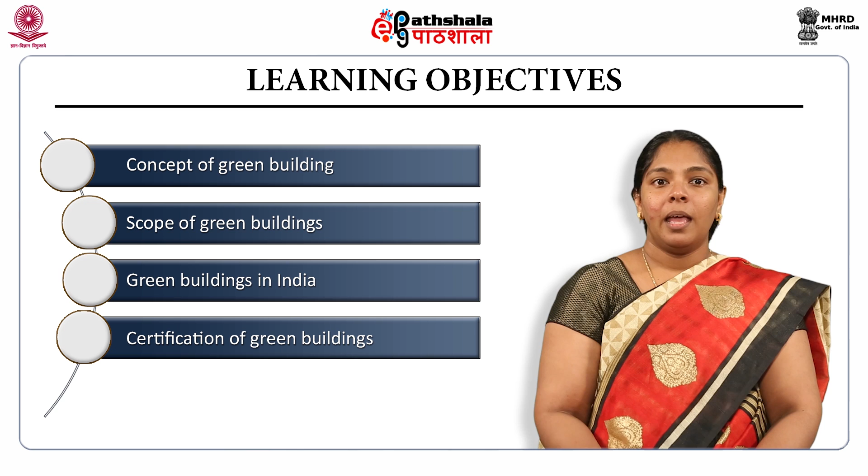The improvement in per capita energy consumption in buildings can be achieved by energy efficient and low carbon building technologies. So, in this module, we are going to discuss the concept of green building, the scope of green buildings in India, the certification of green buildings, and especially GRIHA rating.

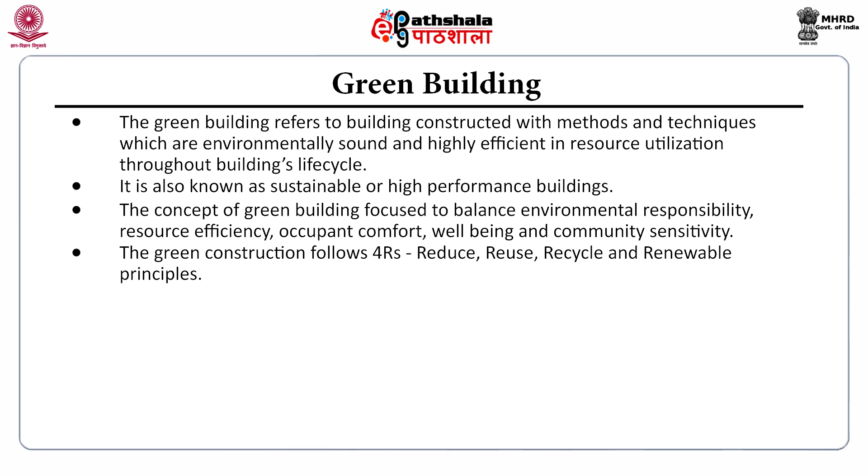Green building refers to buildings constructed with methods and techniques which are environmentally sound and highly efficient in resource utilization throughout the building's life cycle. It is also known as sustainable or high performance buildings. The concept of green building focuses on balancing environmental responsibility, resource efficiency, occupant comfort, well-being and community sensitivity. Green construction follows the major 4 R's: reduce, reuse, recycle and renewable principles.

So, green buildings are designed to reduce the overall impact of the built environment on human health and the natural environment by efficient use of energy, water and other resources. They incorporate sustainable materials in their construction, that is reused, recycled content or made from renewable resources, protecting occupant health and improving employee productivity.

They create healthy indoor environments with minimal pollutants, that is, reduced product emissions. Reducing waste, pollution and environmental degradation. They feature landscaping that reduces water usage, by using native plants that survive without extra water.

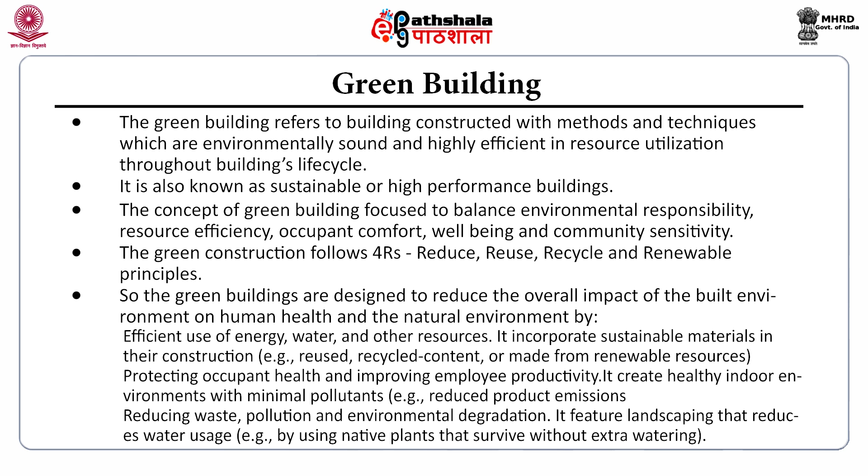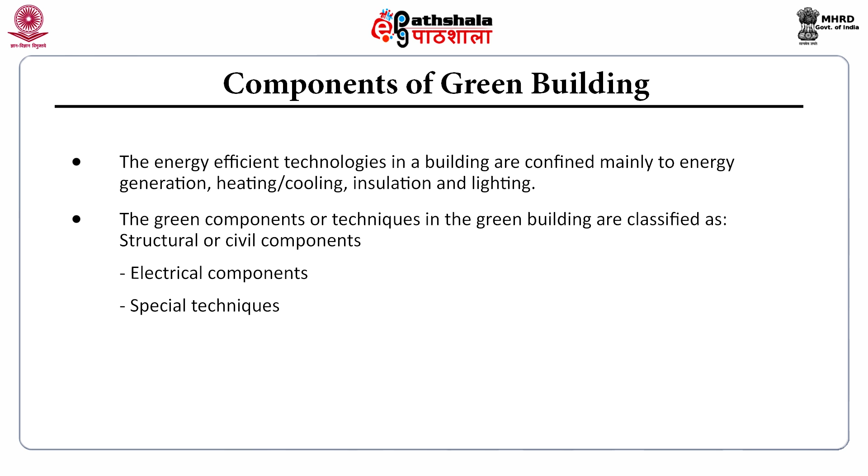What are the components of green building? The energy efficient technologies in a building are confined mainly to energy generation, heating or cooling, insulation and lighting. The green components or techniques in green building are classified as structural or civil components, electrical components and special techniques. What are these structural or civil components?

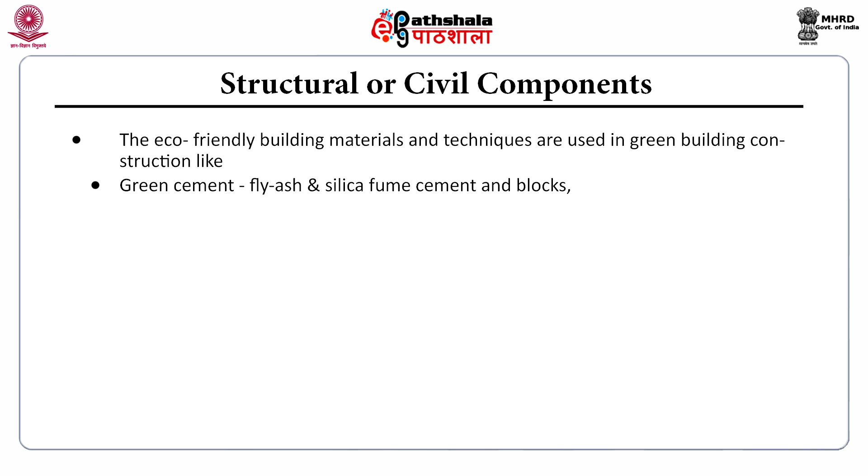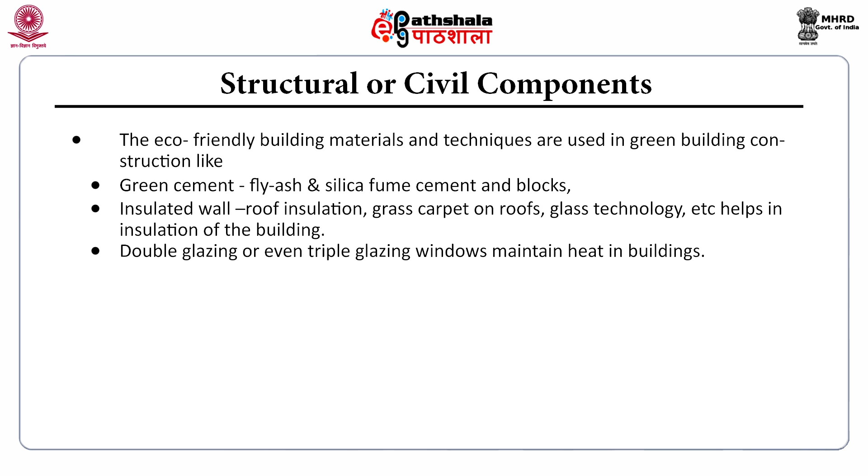Eco-friendly building materials and techniques are used in green building construction, like green cement, that is fly ash silica fume cement and blocks, insulated walls, roof insulation, grass carpet on roofs, glass technology etc., which help in insulation of the building. Double glazing or even triple glazing windows maintain heat in buildings. Smart windows allow light through, but block infrared and ultraviolet radiation that produces heat.

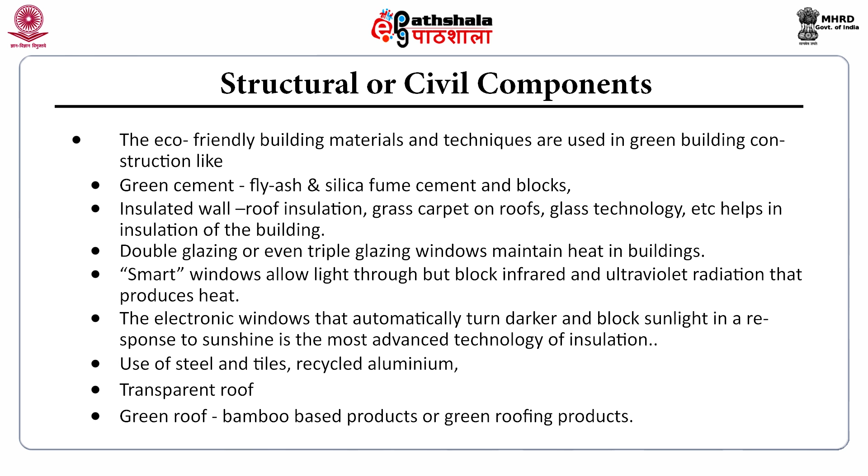Electronic windows automatically turn darker and block sunlight in response to sunshine, which is the most advanced insulation technology. Use of steel and tiles, recycled aluminium, transparent roofs, green roofs, bamboo based products or green roofing products. These are the structural components.

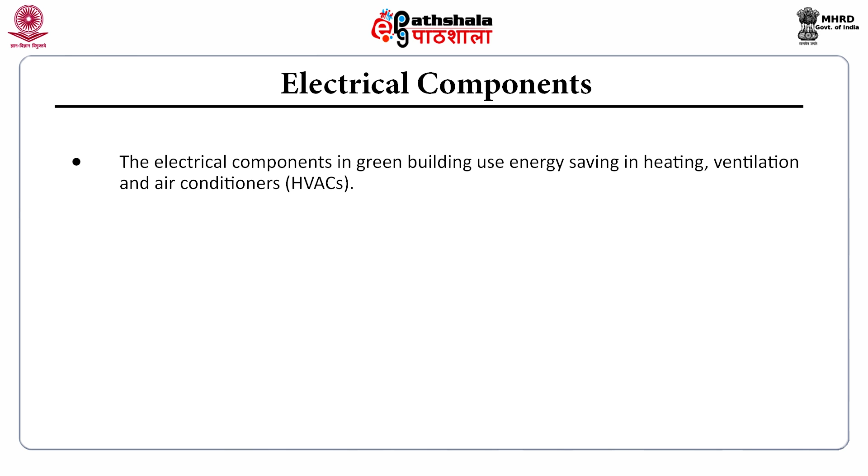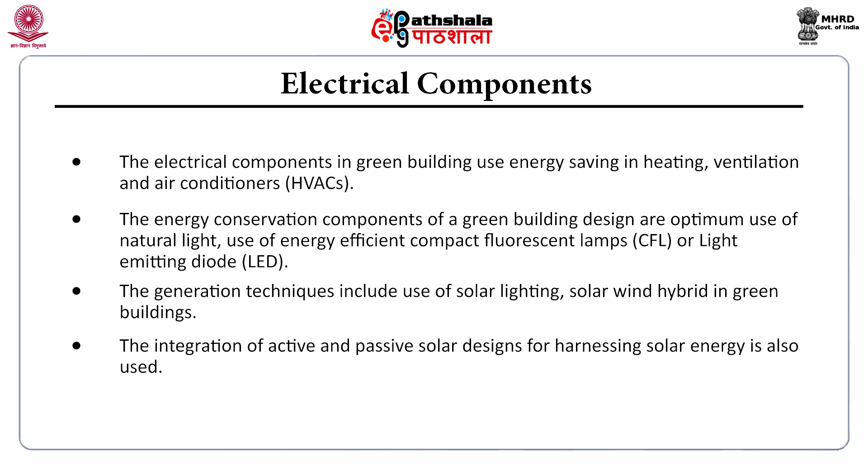Electrical components in green building use energy saving in HVACs, that is heating, ventilation and air conditioning. The energy conservation components of a green building design are optimum use of natural light, use of energy efficient compact fluorescent lamps, that is CFL lamps, and LEDs, light emitting diode lamps. The generation techniques include use of solar lighting and solar wind hybrids in green buildings. The integration of active and passive solar designs for harnessing solar energy is also used.

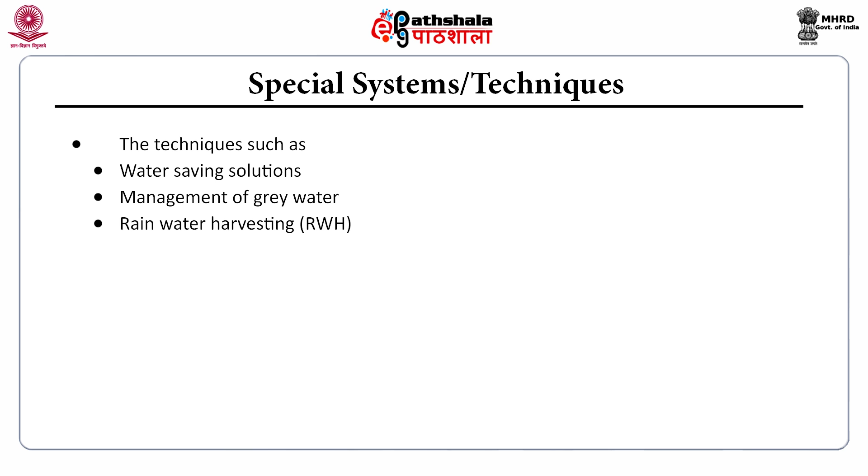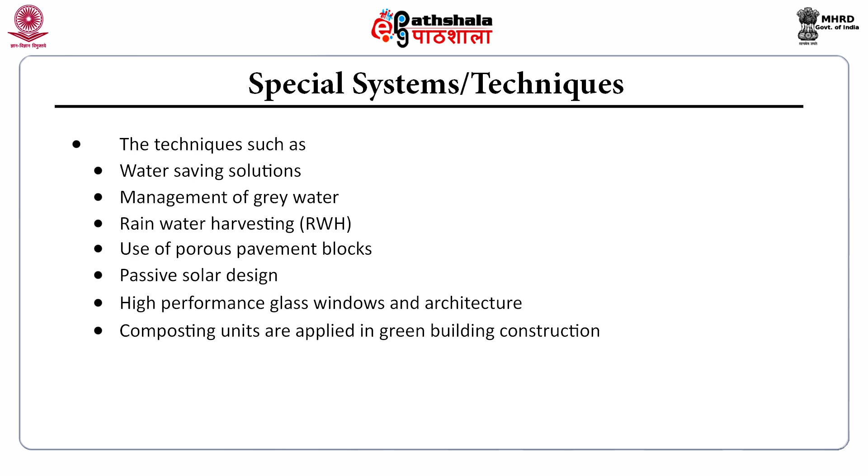The special systems or techniques are water saving solutions, management of grey water, rainwater harvesting, use of porous pavement blocks, passive solar design, high performance glass windows and architecture, and composting units. These are applied in green building construction. Scope of green buildings.

In developing countries, energy consumption is mostly for cooking, while in developed countries like the US, energy use is mainly for space heating, lighting and other appliances. The home size in the USA is also higher than in India. In India, it is around 40 square meters, while in the USA, it averages 200 square meters.

The average annual change in buildings energy consumption in India is 2.7% per year from 2015 to 2040. The global consumption of electricity in buildings is growing at a rate of 2.5% per year. In non-OECD countries, the electricity usage is increased by nearly 6%.

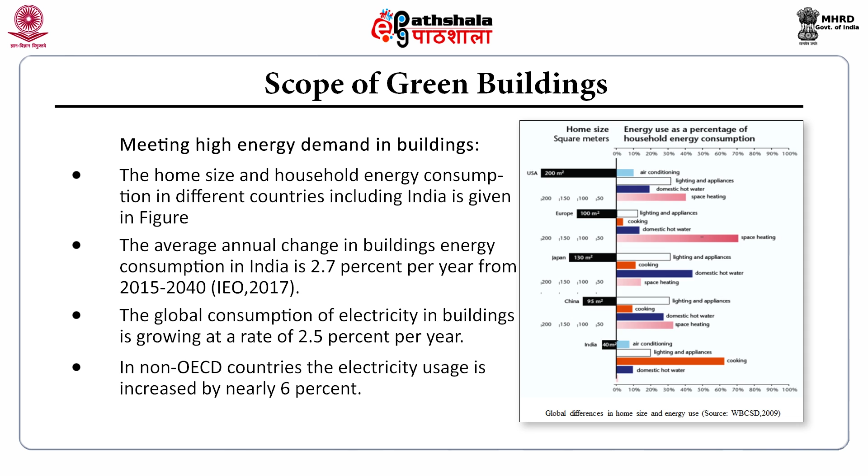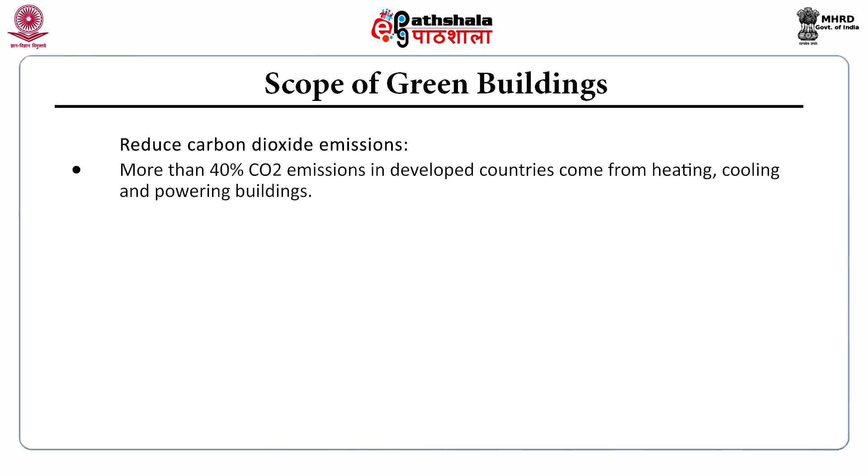Coming to the next scope of this green building, it is the reduction in the carbon dioxide emission. More than 40% of carbon dioxide emissions in developed countries come from heating, cooling and powering buildings. Good insulation, window glazing and recovering heat from ventilation systems are efficient ways to reduce emissions.

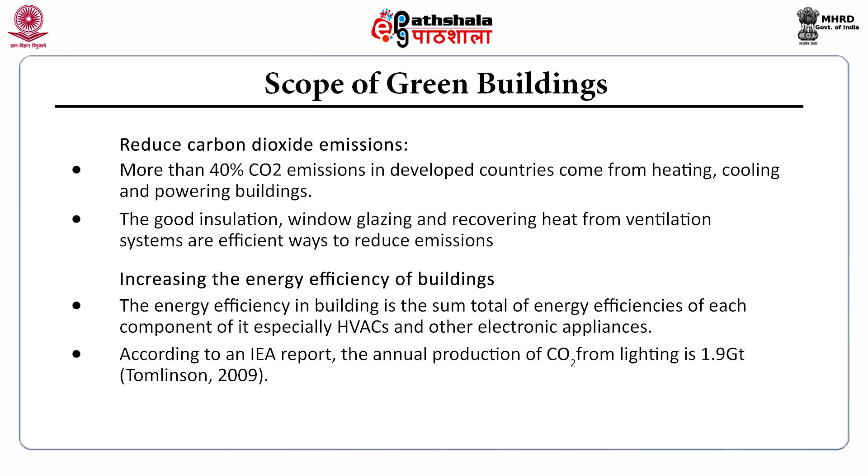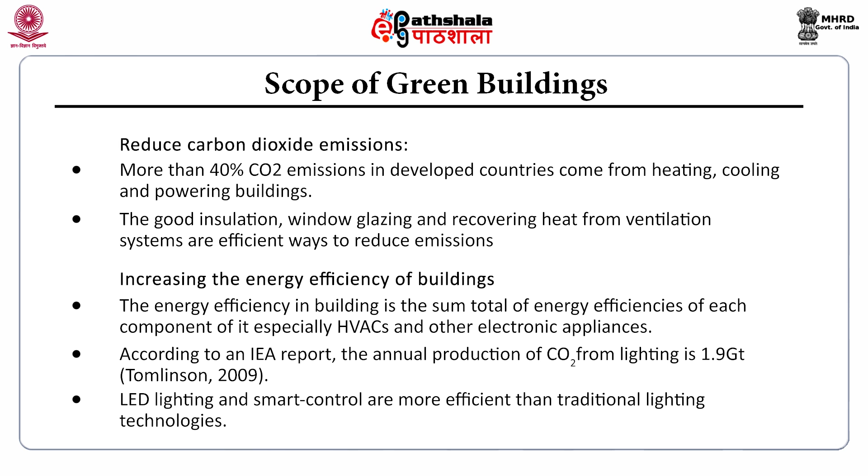Increasing the energy efficiency of buildings. The energy efficiency in a building is the sum total of energy efficiencies of each component of it, especially these HVACs and other electronic appliances. According to an International Energy Agency report, the annual production of carbon dioxide from lighting is 1.9 gigatons. LED lighting and smart control lighting are more efficient than the traditional lighting technologies.

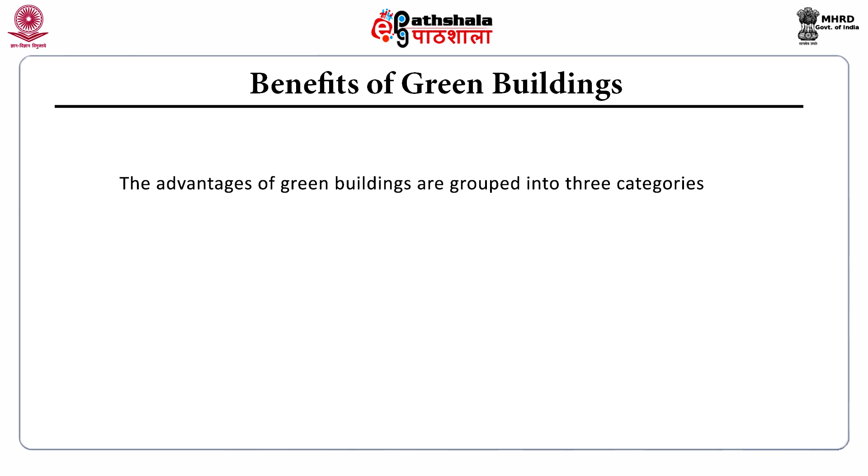What are the benefits of this green building? We have seen the scope. The advantages of green buildings are grouped into three categories: environmental, economic and social. What are the environmental benefits of a green building? It improves the air quality. The carbon dioxide emission from green buildings is comparatively lesser than the conventional buildings. It is aimed at water conservation and improves water quality.

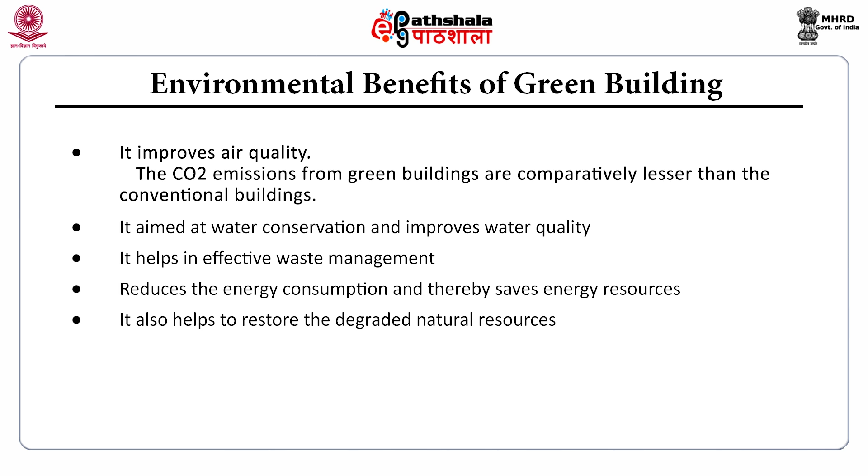It helps in effective waste management. It reduces the energy consumption and thereby saves energy resources. It enables conservation of natural resources. It also helps to restore the degraded natural resources. These buildings conserve the biodiversity and also protect the ecosystem. Green buildings prevent habitat destruction for energy production and pollution from fossil fuel combustion that threaten this biodiversity.

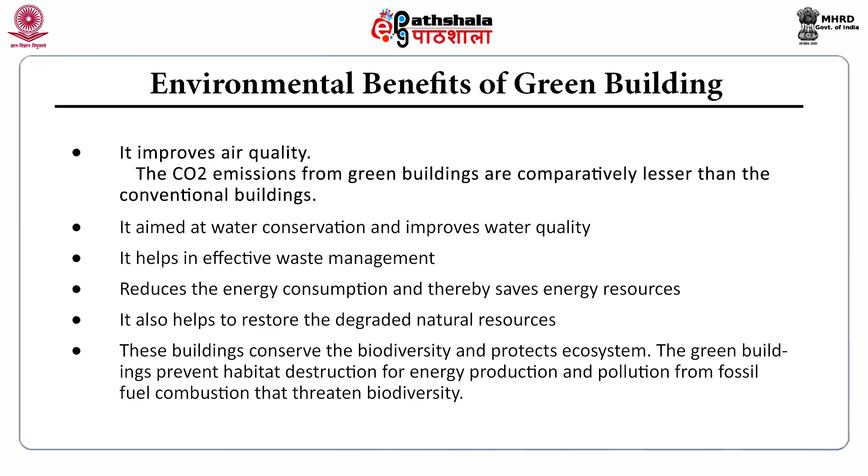What are the economic benefits? Cost effectiveness in the long term is the economic benefit of green building. It reduces the electricity consumption and so the charges to be paid also get reduced. The operational cost in the buildings is comparatively less. It helps in optimization of life cycle economic performance. It improves the productivity of the occupants living in the building. The water consumption gets reduced and wastewater generation and treatment also get reduced.

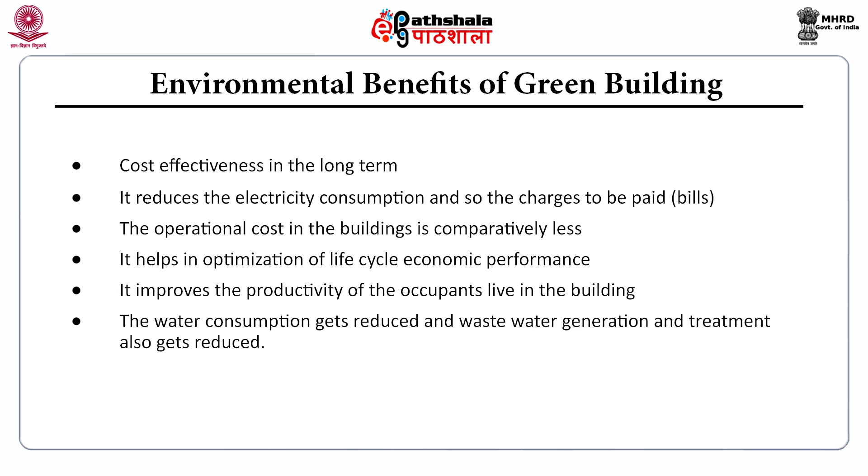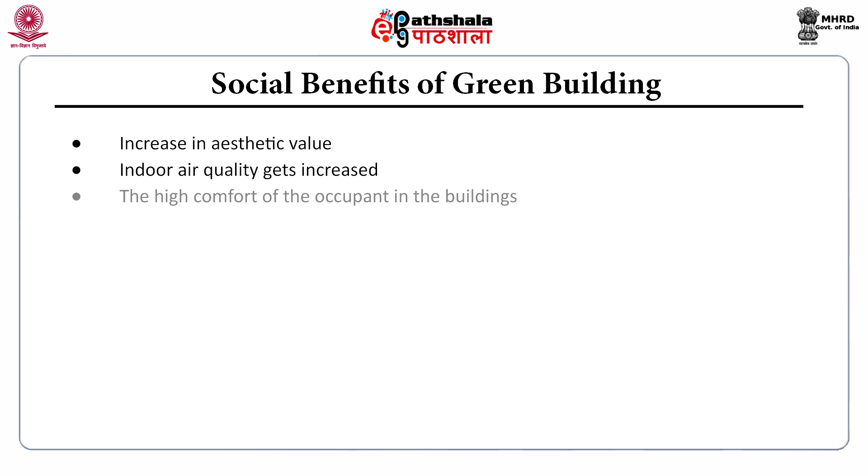The social benefits of green building include increase in aesthetic value, increased indoor air quality, high comfort to the occupant, improving the occupant health, improving overall life quality, enhancing occupant health and comfort. The infrastructure use also gets reduced and thereby the pressure on it also gets reduced.

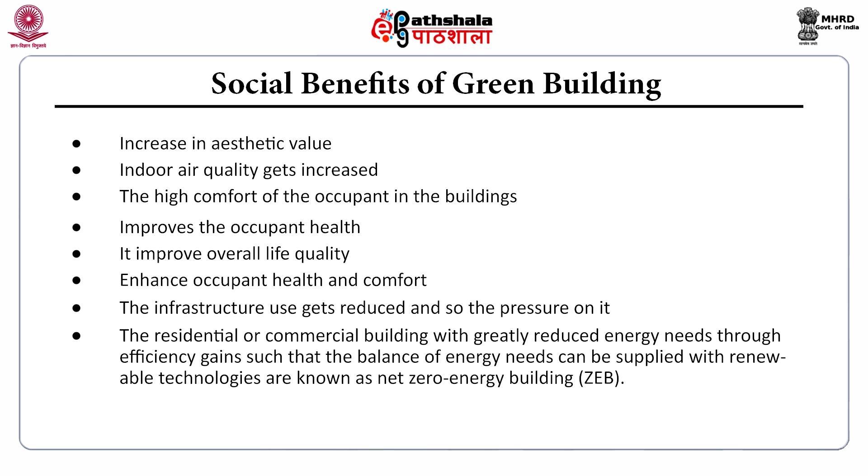A residential or commercial building with greatly reduced energy needs through these efficiency gains, such that the balance of energy needs can be supplied with renewable technologies, is known as a net zero energy building. So, we have seen what is green building and what are its benefits. Now, what are the green buildings presently seen in India?

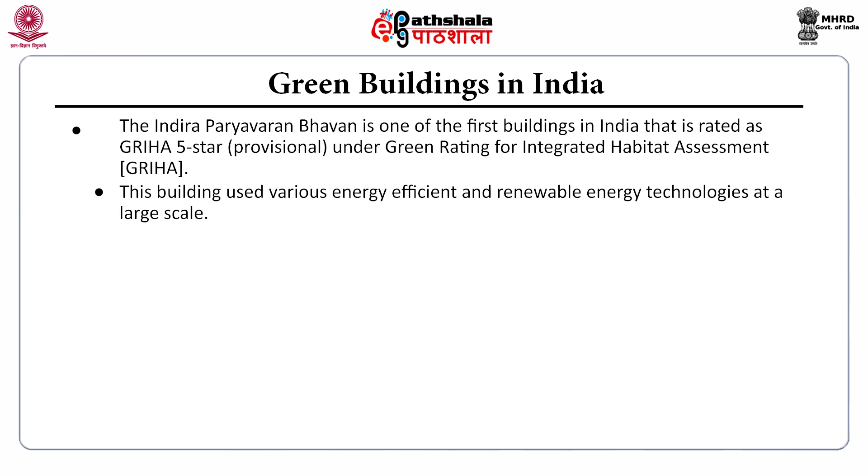One of the important green buildings is the Indira Paryavaran Bhavan building. It is one of the first buildings in India that is rated GRIHA 5-star under the Green Rating for Integrated Habitat Assessment. GRIHA means Green Rating for Integrated Habitat Assessment. This building used various energy efficient and renewable energy technologies at a large scale.

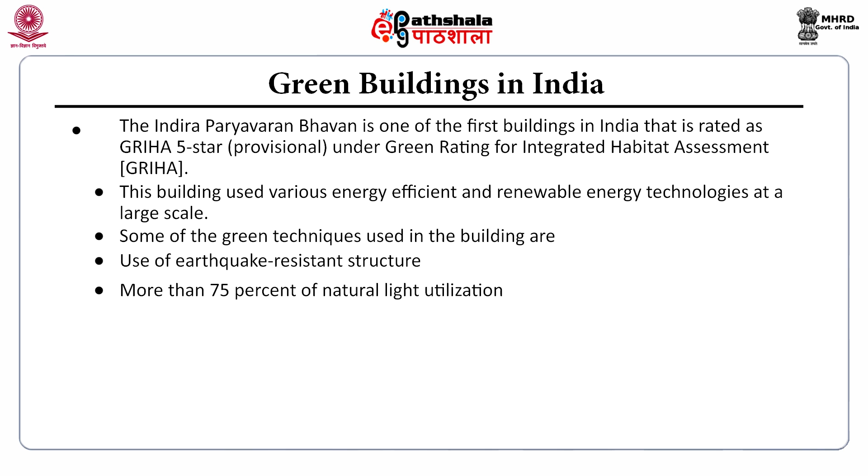Some of the green techniques used in this building are the usage of an earthquake resistant structure, more than 75% natural light utilization, a thin client networking system, a robotic parking system in the basement for accommodating around 300 plus cars, and planting trees and grasses in more than 50% of the area outside the building. This building is also fully compliant with the requirements of ECBC, that is the Energy Conservation Building Code of India.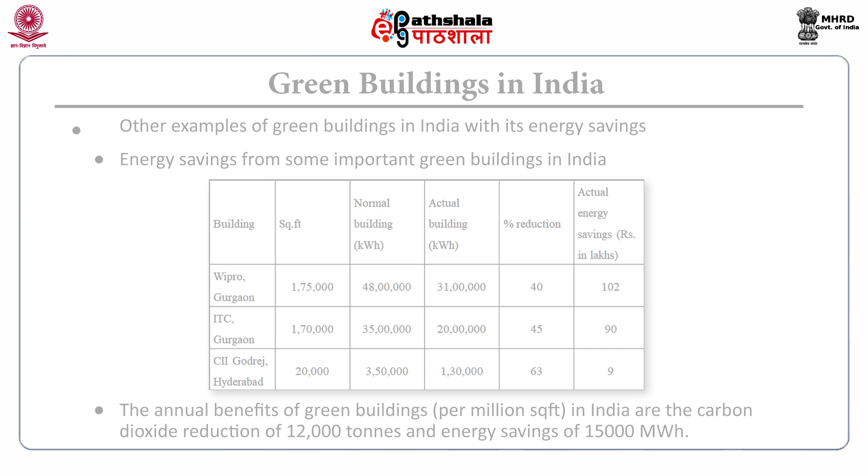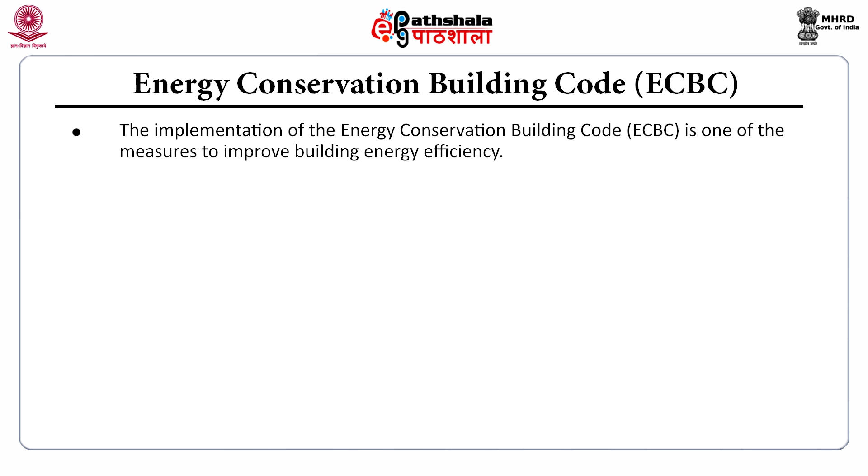Now, what is this ECBC, that is the Energy Conservation Building Code? The implementation of the ECBC is one of the measures to improve building energy efficiency. It is the first building code in India and was launched in February 2007 by the Bureau of Energy Efficiency. This code is applicable to new commercial buildings with a connected load above 100 kilowatt or a contract demand of over 120 kilovolt amperes.

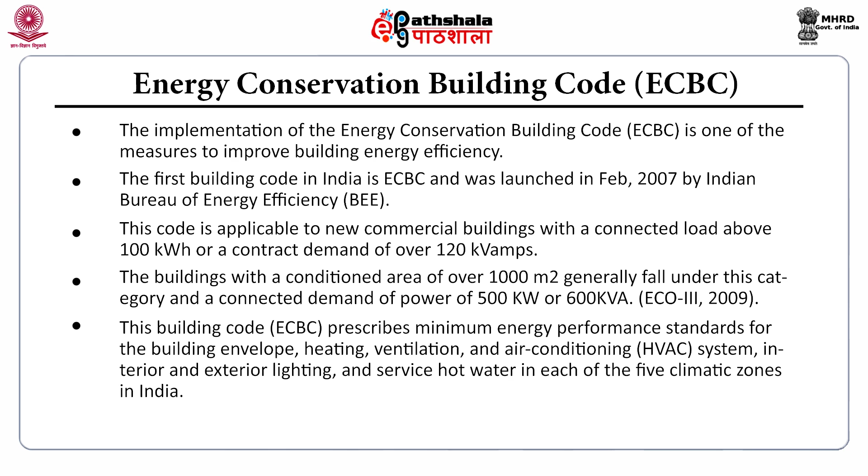The buildings with a conditioned area of over 1000 square meters generally fall under this category, and a connected demand of power of 500 kilowatt or 600 kilovolt ampere. This building code prescribes minimum energy performance standards for the building envelope, heating, ventilation and air conditioning system, interior and exterior lighting and service hot water in each of the 5 climatic zones in India. It also sets energy efficiency requirements for building electric power and motors.

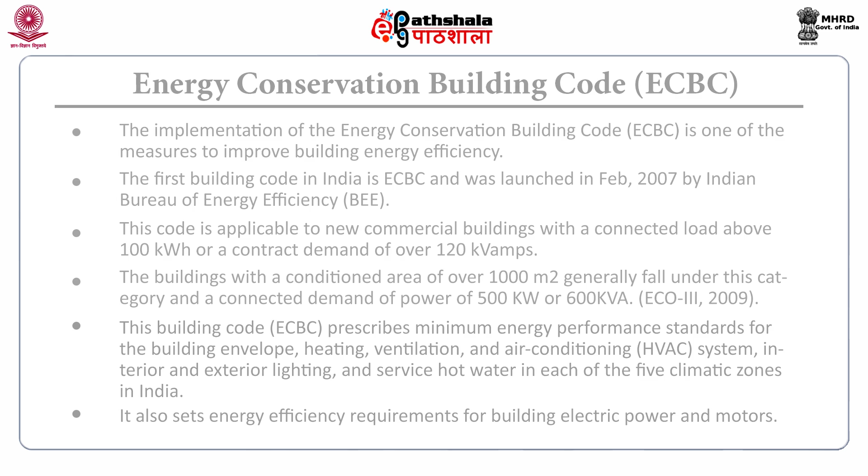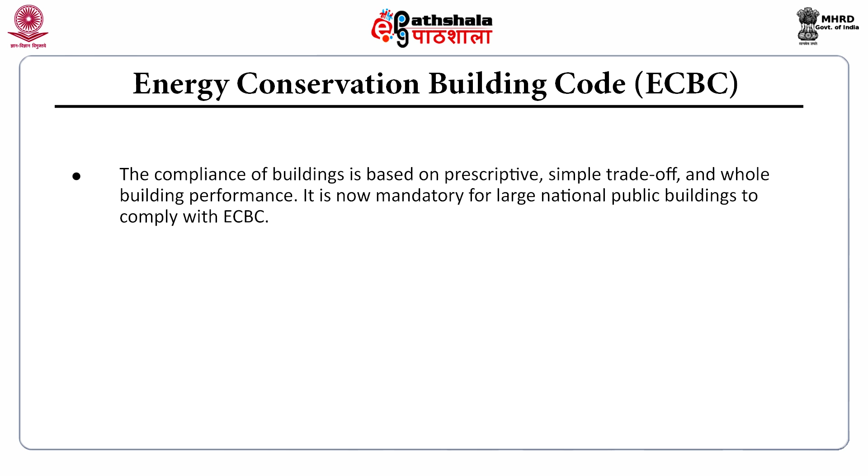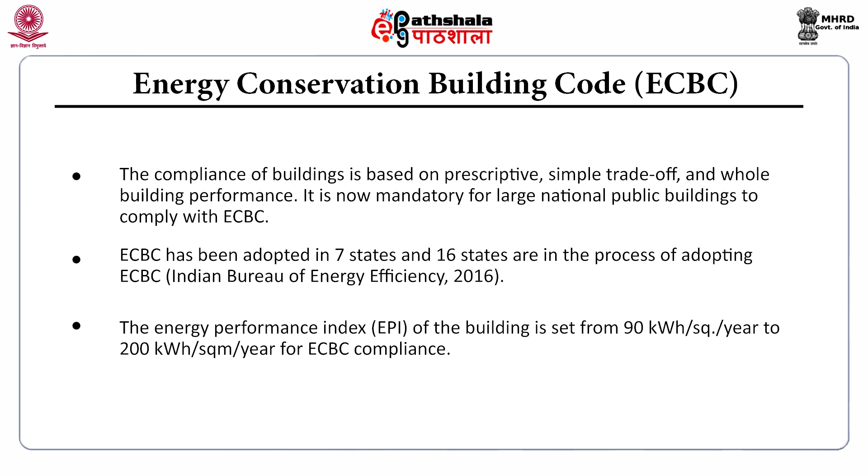The compliance of building is based on prescriptive, simple trade-off and whole building performance. It is now mandatory for large national public buildings to comply with ECBC. It has been adopted in 7 states and 16 states are in the process of adopting this code. The energy performance index of the building is set from 90 kilowatt hour per square meter per year to 200 kilowatt hour per square meter per year for the ECBC compliance.

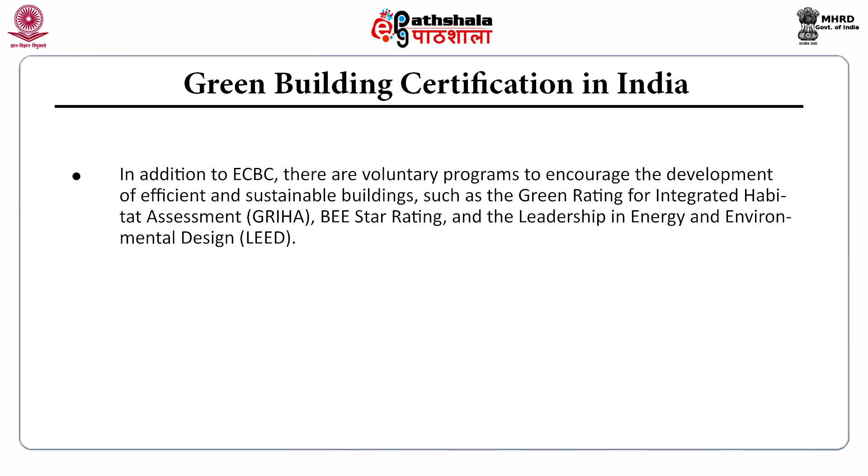Green building certification in India. In addition to this ECBC, there are voluntary programs to encourage the development of efficient and sustainable buildings. These include GRIHA rating, that is Green Rating for Integrated Habitat Assessment, BEE, Bureau of Energy Efficiency Star Rating, and LEED, that is Leadership in Energy and Environmental Design. Let's see what this GRIHA means. The Green Rating for Integrated Habitat Assessment is the recent national rating system of India. It was developed by the Energy and Resources Institute jointly with the Ministry of New and Renewable Energy.

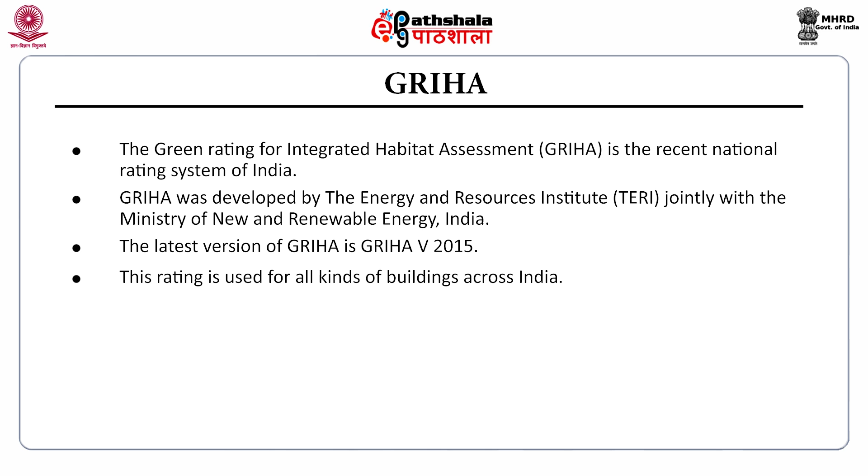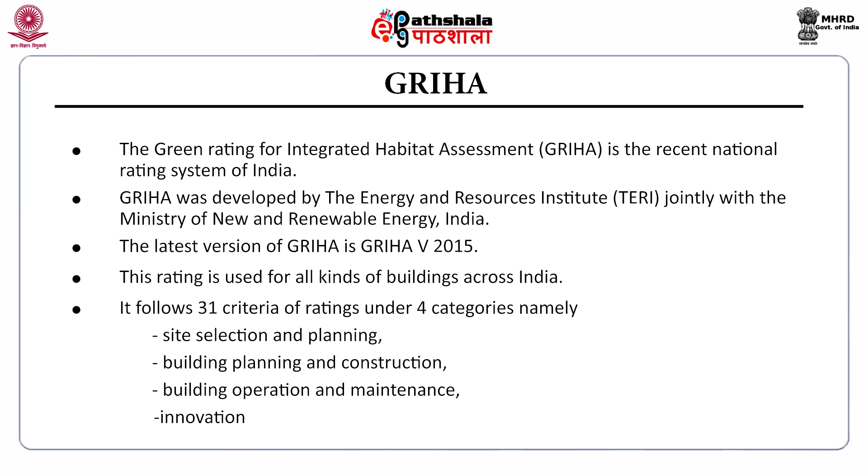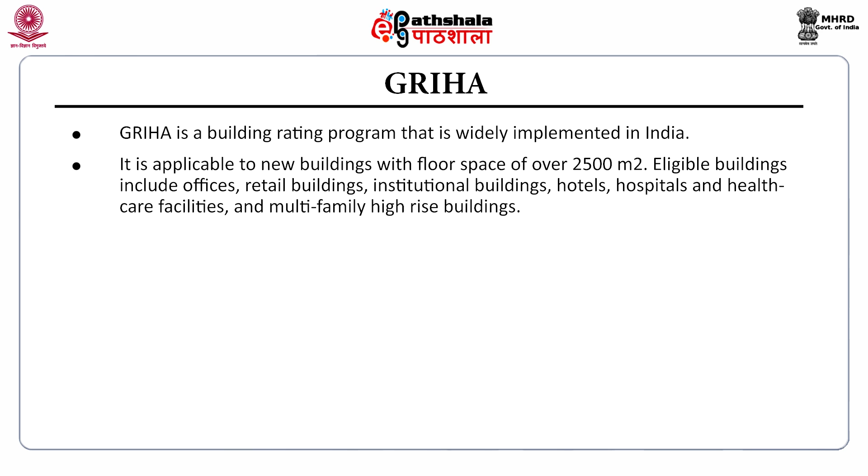The latest version of GRIHA is GRIHA V 2015. This rating is used for all kinds of buildings across India. It follows 31 criteria of rating under 4 categories, namely site selection and planning, building planning and construction, building operation and maintenance, and innovation. GRIHA is a building rating program that is widely implemented in India. It is applicable to new buildings with floor space of over 2,500 square meters. Eligible buildings include offices, retail buildings, institutional buildings, hotels, hospitals, healthcare facilities, multifamily high-rise buildings.

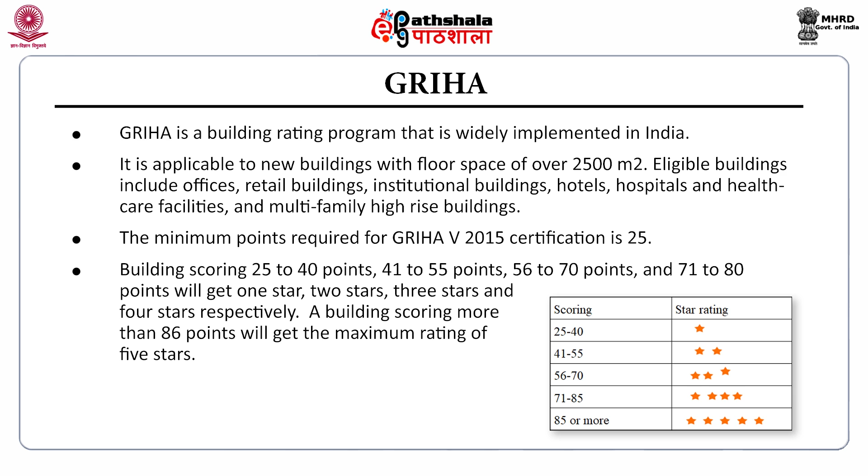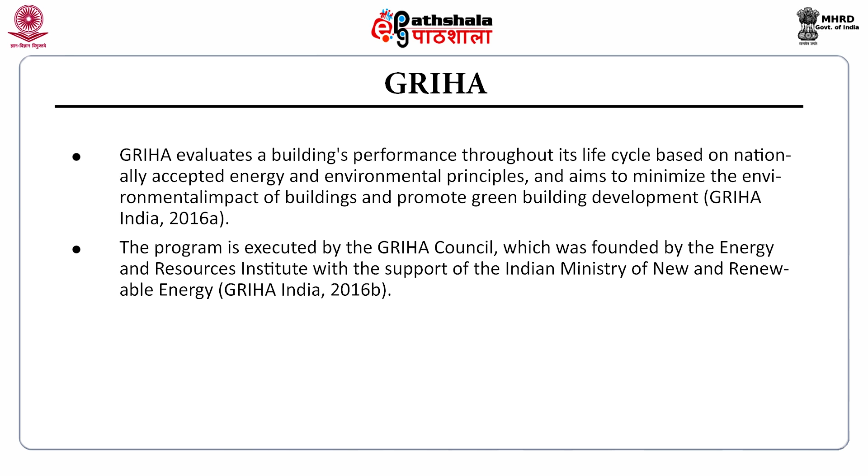The minimum points required for GRIHA V 2015 certification is 25. Buildings scoring 25 to 40 points will get 1 star, 41 to 55 points will get 2 star, 56 to 70 will get 3 star, 71 to 80 points will get 4 star respectively. A building scoring more than 86 points will get a maximum rating of 5 star. GRIHA evaluates a building's performance throughout its life cycle based on nationally accepted energy and environmental principles, and it aims to minimize the environmental impact of buildings and promote green building development. The program is executed by GRIHA Council, which was founded by the Energy and Resources Institute. There are currently 700 plus projects registered with this GRIHA system as per 2016 records.

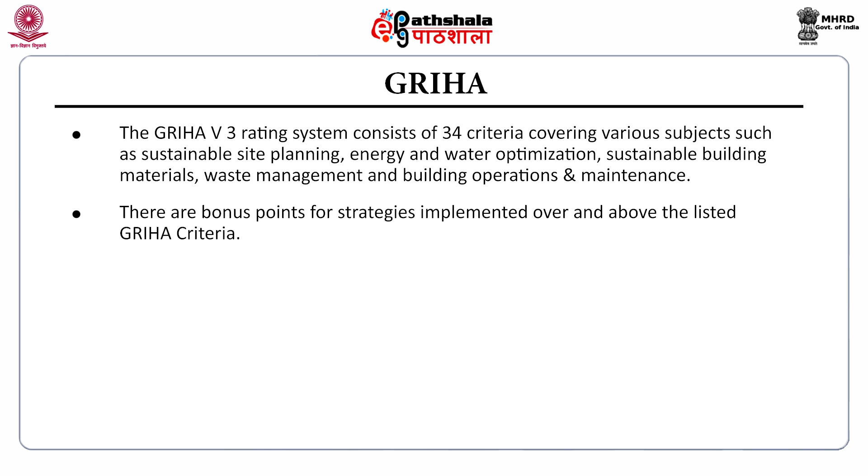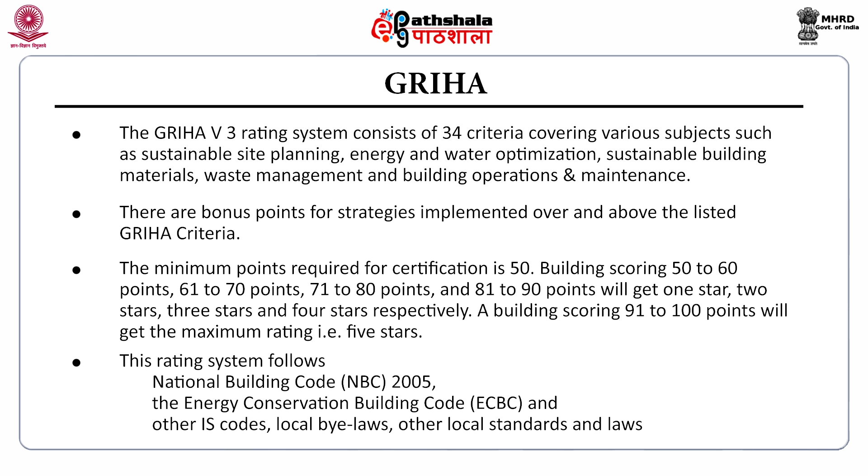The GRIHA rating system consists of 34 criteria covering various subjects such as sustainable site planning, energy and water optimization, sustainable building materials, waste management and building operation and maintenance. There are bonus points for strategies implemented over and above the listed GRIHA criteria. The minimum points required for certification is 50. Buildings scoring 50 to 60 points, 61 to 70, 71 to 80 and 81 to 90 points will get 1, 2, 3 and 4 star respectively. A building scoring 91 to 100 will get maximum rating of 5 star. This rating system follows National Building Code 2005 and the ECBC and other Indian standard codes, local bylaws and other local standards and laws.

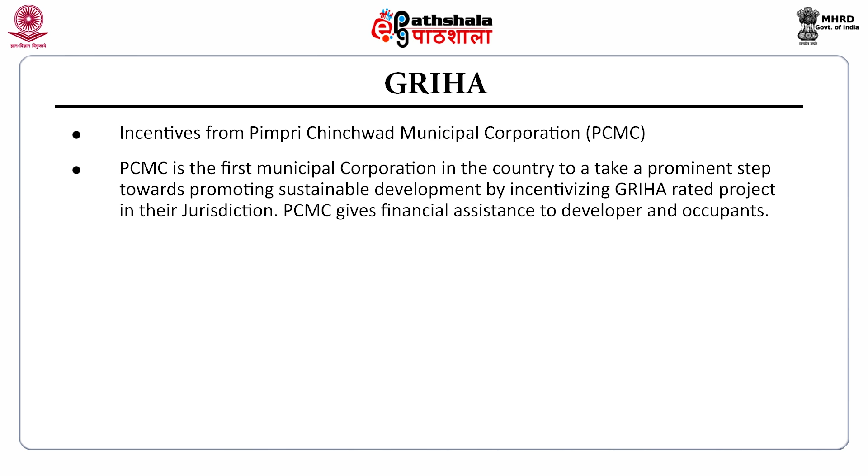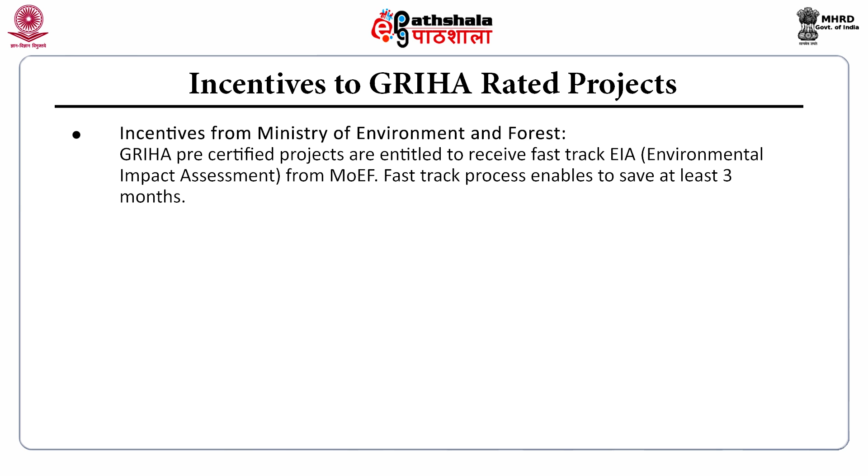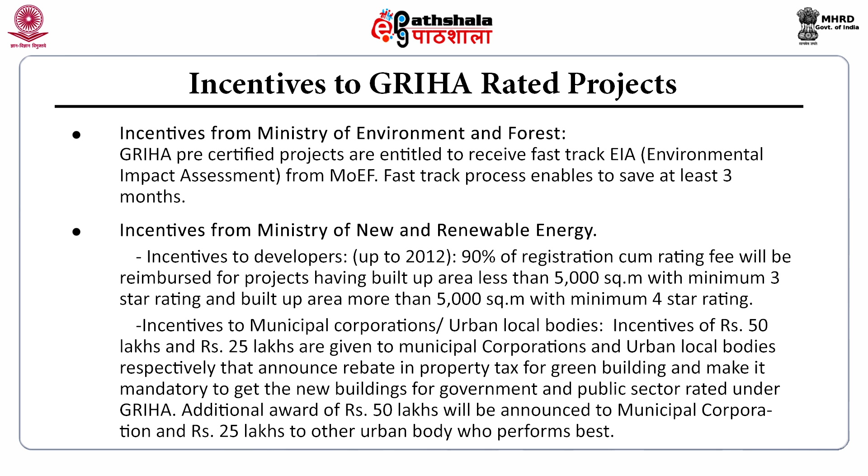Incentives from MNRE: they have given incentives to the developers up to 2012. 90% of the registration cum rating fee will be reimbursed for projects having built-up area less than 5,000 square meters with a minimum 3-star rating and built-up area more than 5,000 square meters with minimum 4-star rating. They have also given incentives to municipal corporations and urban local bodies. Incentives of rupees 50 lakh and rupees 25 lakh are given to municipal corporations and urban local bodies respectively that announce rebate in property tax for green buildings and make it mandatory to get new government and public sector buildings rated under GRIHA.

And also the incentives from the banks. Small Industries Development Bank of India has announced a scheme of providing financial assistance at a concessional rate of interest to GRIHA rated projects. For GRIHA compliant projects, the processing fee is waived by SBI for home loans. SBI gives 0.25% rebate.

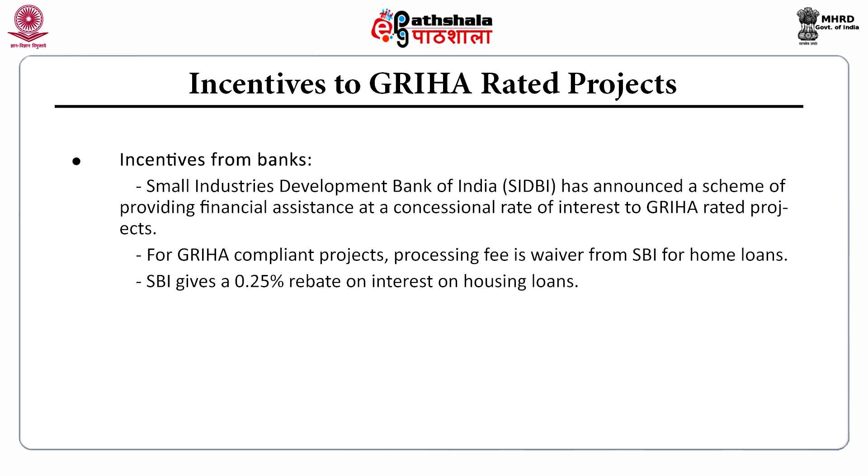GRIHA in detail. Now what is this LEED? That is the Leadership in Energy and Environmental Design Rating System. It's a product of the US Green Building Council that provides a complete framework for assessing building performance and meeting sustainability goals within a 6 category rating system. The categories are sustainable sites, water efficiency, energy and atmosphere, materials and resources, indoor environmental quality and innovation and design.

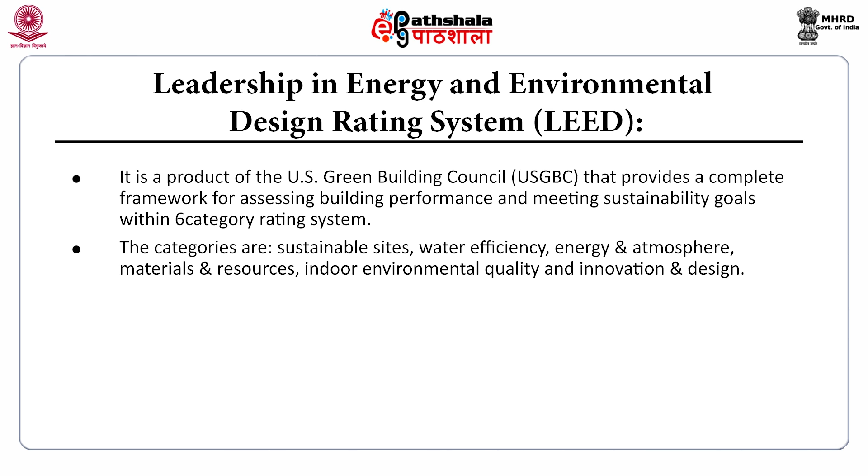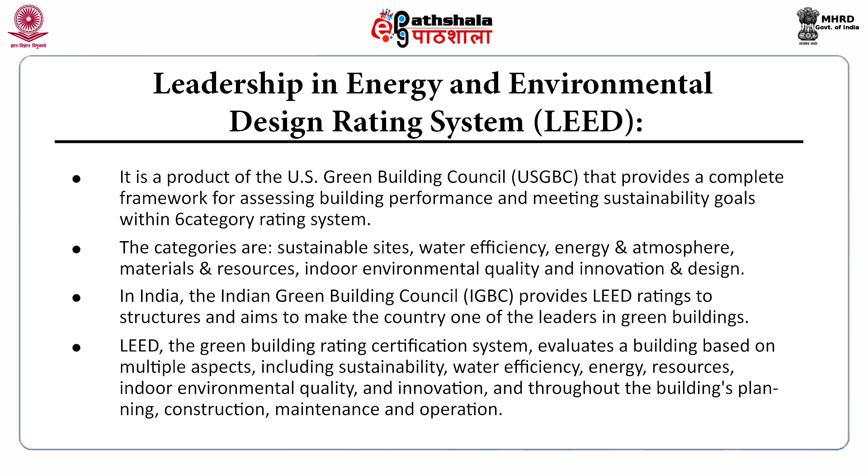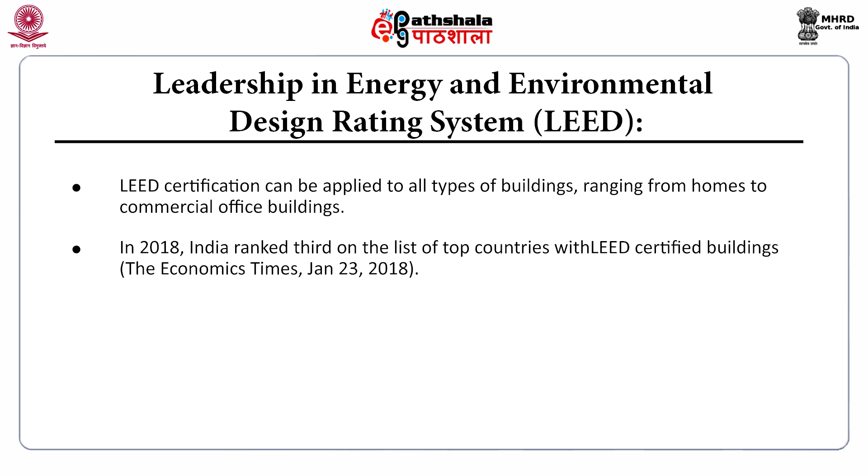In India, the Indian Green Building Council provides LEED ratings to structures and aims to make the country one of the leaders in green buildings. LEED, the Green Building Rating Certification System, evaluates a building based on multiple aspects including sustainability, water efficiency, energy, resources, indoor environmental quality and innovation, throughout the building's planning, construction, maintenance and operation. LEED certification can be applied to all types of buildings ranging from homes to commercial office buildings. In 2018, India ranked 3rd on the list of top countries with LEED certified buildings.

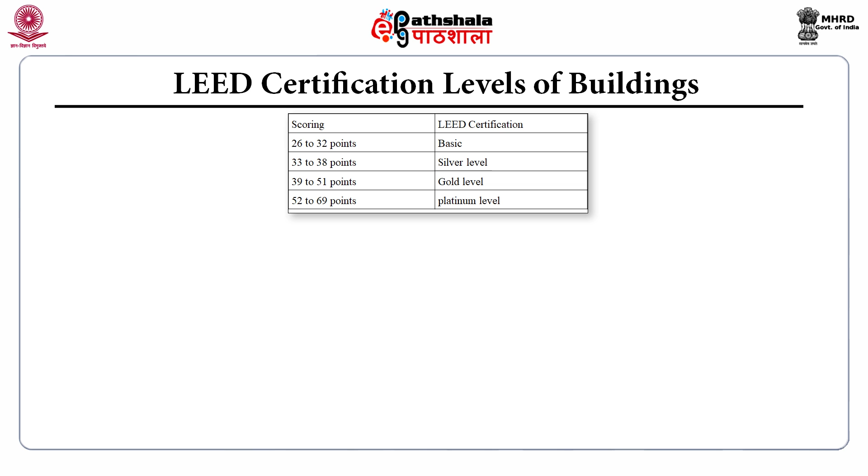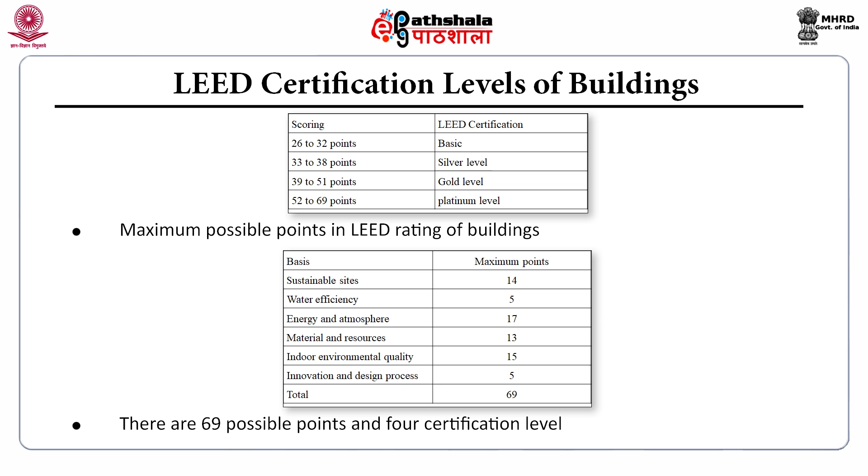In this slide, you can see the LEED certification levels. It has 4 levels, that is basic, silver, gold and platinum, having different scoring. If it is 26 to 32, that is basic level; 33 to 38 is silver level, 39 to 51 gold level and 52 to 69 platinum level. And you can see the maximum possible points in LEED rating of buildings in this table. There are 69 possible points and we have seen the 4 certification levels under LEED.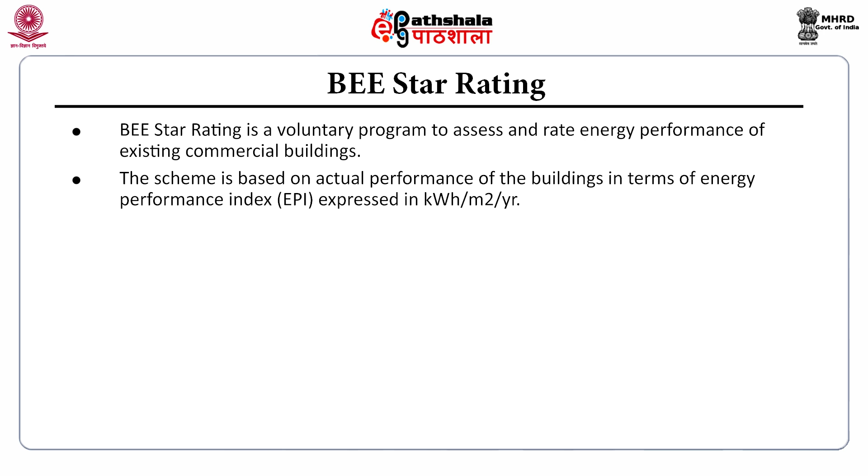Bureau of Energy Efficiency Star Rating. It's a voluntary program to assess and rate energy performance of existing commercial buildings. The scheme is based on actual performance of the building in terms of energy performance index, expressed in kilowatt hour per square meter per year. The scale used is 1 to 5. This rating is applicable for both air-conditioned and non-air-conditioned buildings. This program will rate buildings having a connected load of 100 kilowatt and above.

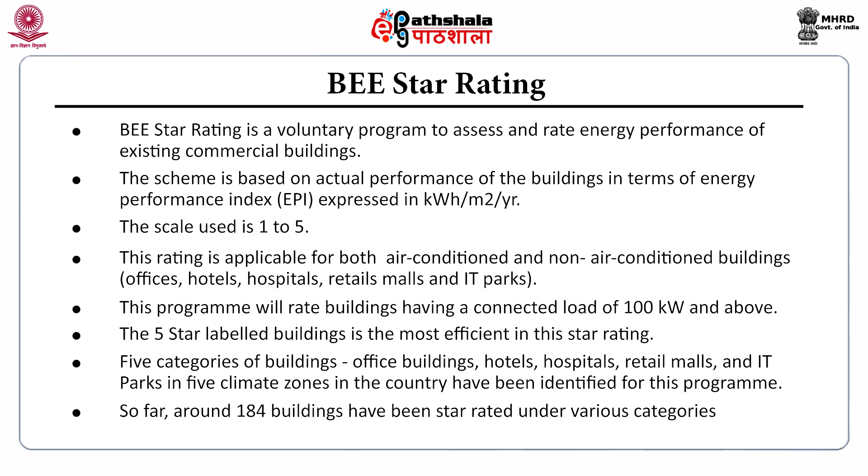The 5-star labeled building is the most efficient in this star rating. 5 categories of buildings: office buildings, hotels, hospitals, retail malls and IT parks in 5 climate zones of the country have been identified for this BEE rating. And so far 184 plus buildings have been star rated under these various categories.

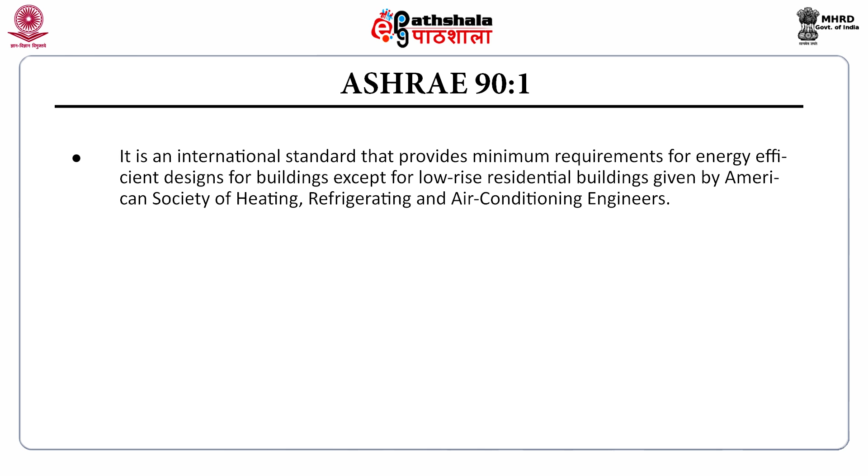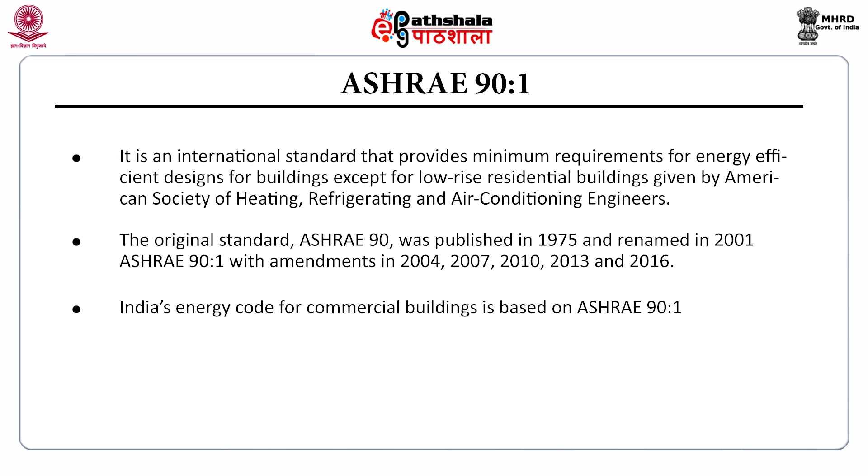Another rating is ASHRAE 90.1. It is an international standard that provides minimum requirements for energy efficient designs for buildings except low-rise residential buildings, given by the American Society of Heating, Refrigerating and Air Conditioning Engineers. The original standard ASHRAE 90 was published in 1975 and it was renamed in 2001 as ASHRAE 90.1 with amendments in 2004, 2007, 2010, 2013 and 2016. India's energy code for commercial buildings is based on this rating.

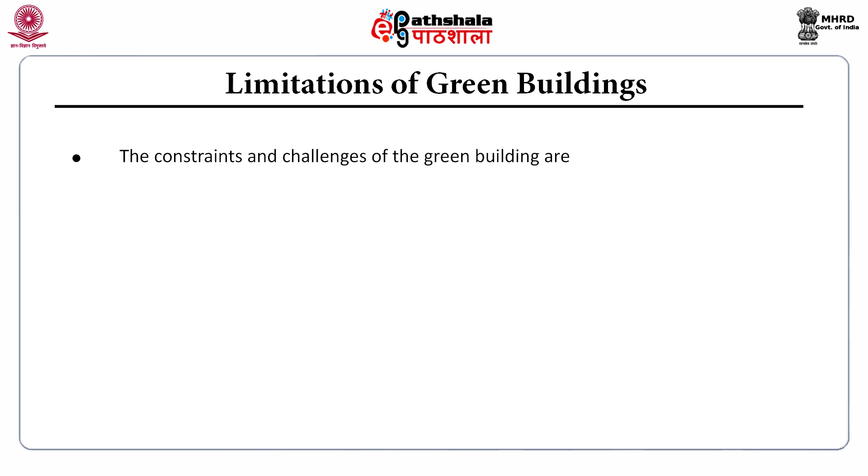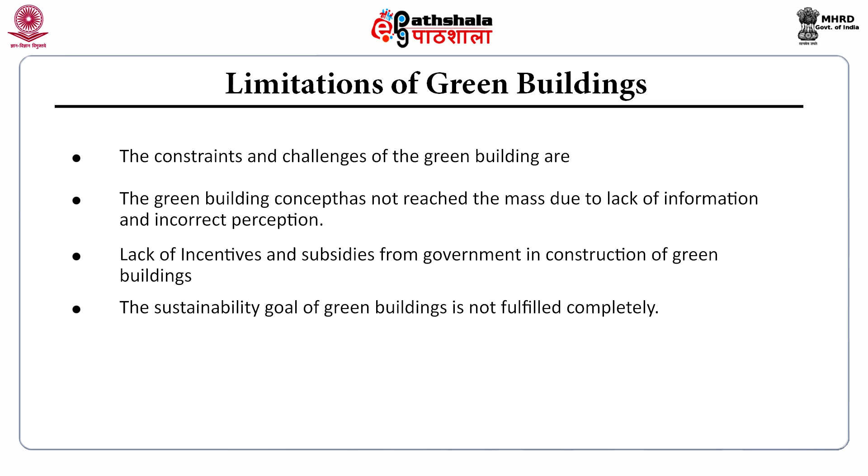But green building has its limitations. The constraints and challenges of green buildings are: the green building concept has not reached the masses due to lack of information and incorrect perception, and lack of incentives and subsidies from government for construction of green buildings. The sustainability goal of green building is not fulfilled completely. The availability of materials for green buildings is difficult. Lack of professional knowledge on green building certification and consulting services also limits green building commercialization.

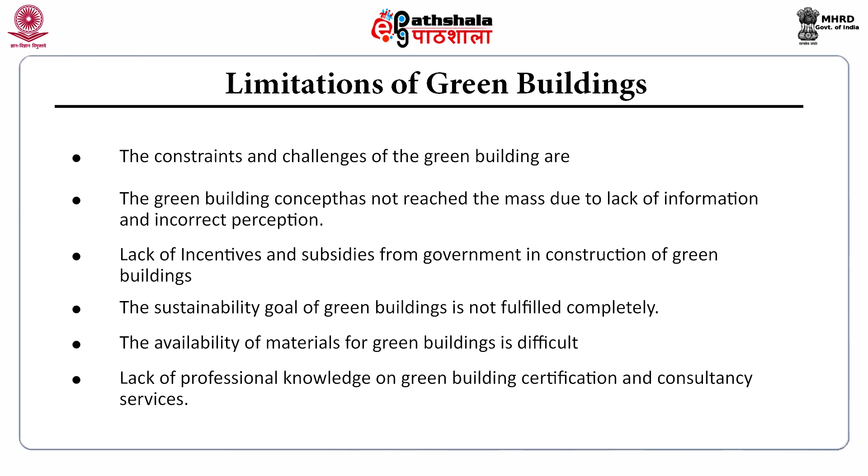So, to conclude, the green building completely follows the principles of energy savings with high efficiency of resources and less wastage throughout its life cycle. The green building saves around 40 to 50% of energy and 20 to 30% of water, along with a shorter payback period on initial investment. There are different voluntary rating systems for buildings in India. So, the world is aiming at green and sustainable buildings in the future.

We have seen in this module the scope of green building, the green buildings presently seen in India, and the certifications given for green buildings, especially the Green Rating for Integrated Habitat Assessment, that is GRIHA rating, and the recent one, GRIHA 5, the Leadership in Energy and Environmental Design rating system, BEE star rating, as well as ASHRAE 90.1.